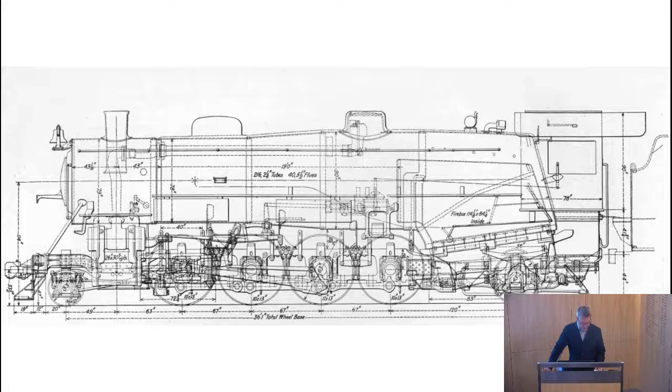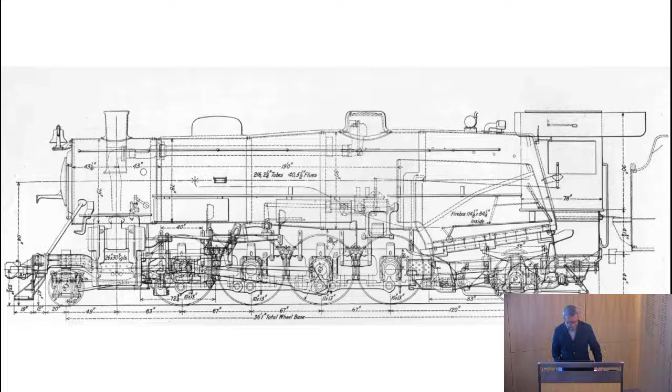During my early teens, I started to understand what fascinated me more about mechanics. I was a keen member of the secondary school engineering club, and the teacher responsible for us was an avid model train buff. He managed to persuade the school to fund materials for a fully operational miniature steam train, and had us all make its parts, some of which required quite detailed machining. It was fascinating to see how this engine gradually grew as each small bit was machined to precise prescribed tolerances. I loved this attention to detail, and I am sure my love of detail was heavily influenced by this experience.

It was through this same club in my later years at secondary school that the most influential opportunity came my way. I was part of a small team of students visited by a structural engineer from Arup. Unfortunately, I can't recall the engineer's name, which still vexes me now, as I have a lot to thank him for. He came and talked to us about structural engineering and what it was about.

He set us a project over a period of months, which was to design a travelling, demountable exhibition. It was, of course, around that time that this collaboration between Renzo Piano and Arup, specifically Peter Rice, had developed the IBM Pavilion, a project that completely gripped me as I began to understand it. The project was so exciting to me then.

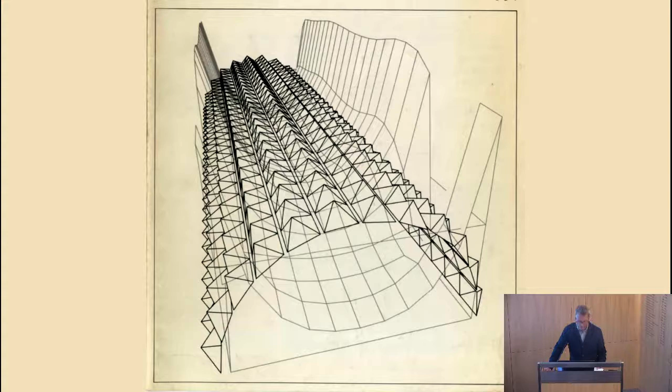We sketched out the design, and we learnt from what we'd been taught, and we trotted off to Fitzroy Square and used a computer at Arup to calculate the frames and establish the member sizes. We were taken on a tour of the recently completed Lord's Mound stand with fabric umbrellas and learnt about this relatively new typology of fabric roofs, all of which seemed so fresh and creative to me.

We went back, built physical models and presented our schemes to Arup, and at the end of the project were judged. Although I don't recall being the winner, it was amazing to see and feel what it was to work in engineering, to tangibly see what can be done through the process of design. This was the single most influential event in my education that ended up making me focus on structural engineering as my career choice. It illustrates the power of a relatively simple intervention in encouraging younger people to be engineers.

As I studied my A-levels, I was introduced to Bill Bailey of Bailey Johnson Hayes Consulting Engineers. I was fortunate enough to be able to work in their office during my holidays. This continued with a sponsorship through the university days in Manchester. Bill was an excellent mentor. He gave me the time and shared his experiences about the fundamentals.

He helped shape my intuition. A man of strong values, pragmatic engineer with wide shoulders to take on any challenge and not to be afraid of it. So thank you for being here, Bill, and thank you for your wisdom and experience.

In 1995, I started working for Tim Macfarlane at Dewhurst Macfarlane and Partners. DMP, as it was known then, was an amazing practice in many ways, and many of today's engineering practices in London and further afield have been formed by the ex-alumni of DMP. It was a hotbed of creative engineers working with some of the best architects in London. As a young engineer, I suddenly felt I was in the right place, doing the right type of work that I could relate to, and my interest spiked.

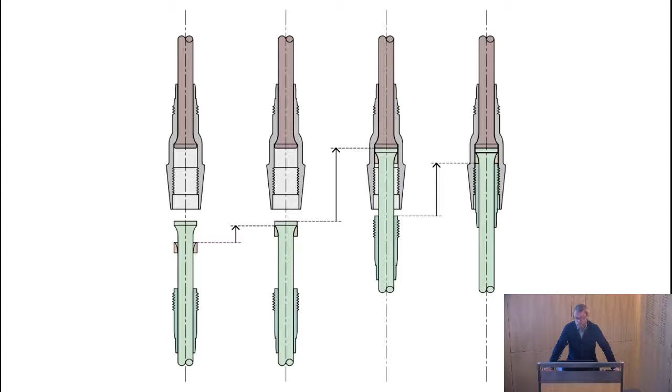It was this, perhaps the CAD skill, which turned out to be the tool that set me free. While I had always been a reasonable sketcher, the accuracy of CAD became essential when starting to detail. It's the only way to truly understand the tolerances, and therefore the only tool you can really use to refine and refine details, which is so critical in engineering and detailing for glass structures.

At this point, I was introduced to Tri-Pyramid Structures, a fantastic, relatively small-scale custom stainless steel parts fabricator. This introduction was pivotal to much of the work I have subsequently done, and we have collaborated on hundreds of custom glass details since. They have a great ability to understand the multiple functions of connections and tease out the most efficient mechanism.

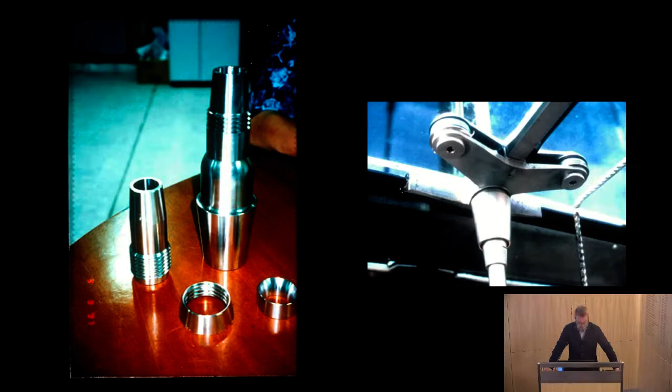I've learned much from them, much of which is traceable in the engineering you will see shortly. The project in Seoul went very well, and the architect Rafael Viñoly invited DMP to support a number of commissions he'd recently won in the US through his studio in New York. I grabbed the opportunity to continue the good work we had done for them in Seoul and went to New York in 1998. The scale was significant compared to the projects I'd done in London, the majority being large-scale public or educational structures, and for this period, much less glass.

One of the projects in which I acted as lead engineer was the David L. Lawrence Convention Center in Pittsburgh, winner of the institution's Supreme Award in 2004. The Convention Center was an important lesson in learning fast how to manage projects of scale with a significant number of stakeholders. The project was a complex one that essentially used a suspension bridge concept merged with a steel megasystem to create long-span, column-free spaces.

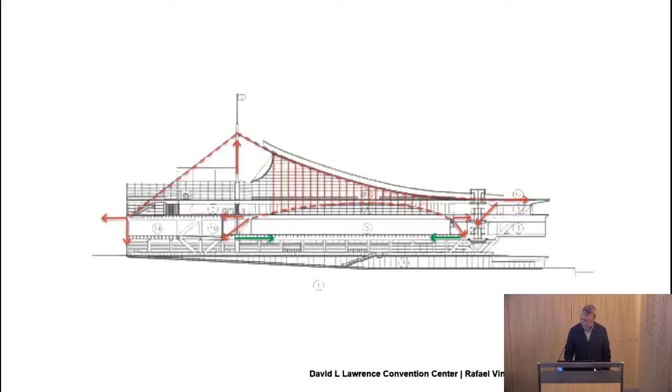It was while working on this that I started to get much more involved in the connections. And the connections are really where the magic happened, an area I was personally interested in refining with the architect, developing giant nodes that transferred these large cable forces into the big steel frames.

It was once, while working through a detail with Rafael Viñoly himself, that I was acutely corrected on a detail I developed for the project. Perhaps naively, I had developed a large steel connection detail fundamentally on the guidance of the US steel guides. The resulting detail was perhaps relatively easy to fabricate, but it was far from efficient in material usage, and was basically ugly.

Anyway, I presented this detail to Rafael. I could see his increasing frustration boiling up as I continually justified this ugly piece of detailing. Before long, he abruptly stopped me with a slam of his fist on the desk and said that I wasn't thinking about the elegance of the connection. So, thinking I was being clever, I pointed out that it didn't matter because the connection was hidden from view and would never be seen. This tipped him over the edge of rage, and he started screaming at me in Spanish some words that I'm fairly sure were not compliments, and surmised that it didn't matter if you couldn't see them, because he could hear them.

I never made that mistake again. Every detail deserves the same attention and the same rigor. And I think perhaps what Rafael could have more calmly referenced was this particular statement by Berthold Lubetkin.

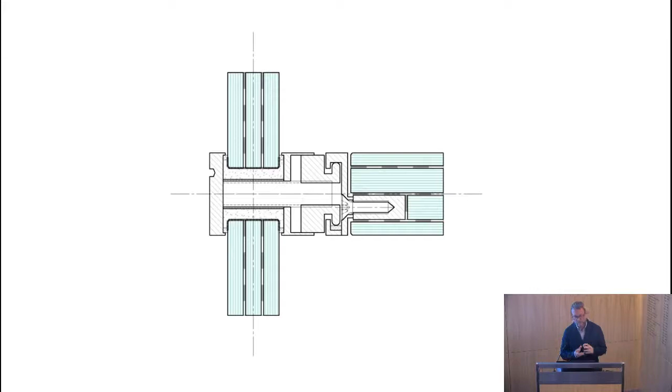So we took these ideas and welded them together in ways, refining a connection that was kept within the depth of the glass tread. It was back to that idea of machining, making sure every millimetre of material was doing something. There was an intention to this detail that not only carried the load and allowed for adjustment in the staircases, but led through to a series and typology of connectivity for many of the staircases and bridges we developed for Apple thereafter. It was the beginning of our innovation in that material.

And you can see here in Soho, it wasn't just the staircase, it became the bridge, it became the handrails, and it was extendable beyond many things.

We're never always going to be doing a staircase in the same place or same environment. This one, for example, in Los Angeles, soon after that first one, was a different structure. It was a series of glass panels hung from above which supported glass treads in the same way, using the same fittings, but the connections were modified slightly so it could accommodate the lateral racking of the building in highly seismic loads.

Then in London, moving forward, we needed to develop something that would allow risers to be integrated with these glass treads, which was a code requirement there. So we developed a further detail, a smaller version, which allowed us to connect risers to the back of the treads. So this carried on.

We started to take this and extend it to different types of structures throughout the network and through the development of Apple stores at the time.

This one in Nagoya was kind of interesting. It was the first in which we decided we could possibly brave taking the glass panels from sitting on the floor and creating a beam, splicing them together with similar connections to the ones we'd evolved, but now demanding much greater loads out of them. With more predictability and satisfaction about how they were behaving, we could be a little braver about how we're using them.

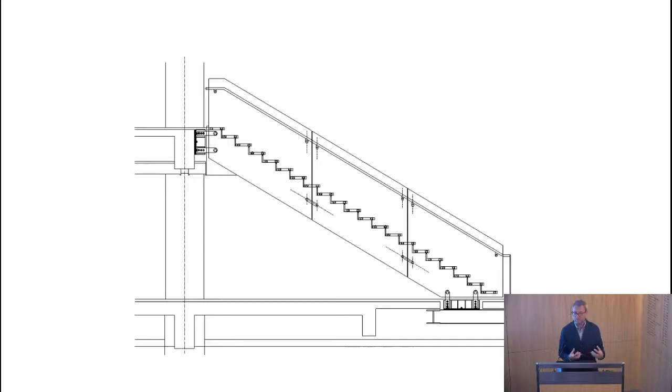Tying each tread to each vertical riser with a modified connection, we get a folding plate behavior and horizontal stiffness across the staircase itself, resisting the lateral forces from seismic excitation, which are pretty prevalent in that part of the world.

Into Beijing, a larger stair was required, broken up into two flights. It was too difficult to do this with splice connections without them becoming too large, so we decided to hang it. In hanging that staircase, we developed another detail which allowed us to pick up the load of each panel within the middle layer of the glass, again using those ideas of insert lamination, with more confidence in the behavior of the materials each time, each project iteratively evolving.

In Covent Garden, it was never going to be straightforward to put it within its own space. In this case, it's combined with historic brickwork, so modifying those details to accommodate the different tolerances between the inaccuracy of Victorian brickwork and the modern German fabricated glass staircase - a different idea of tolerances between the two.

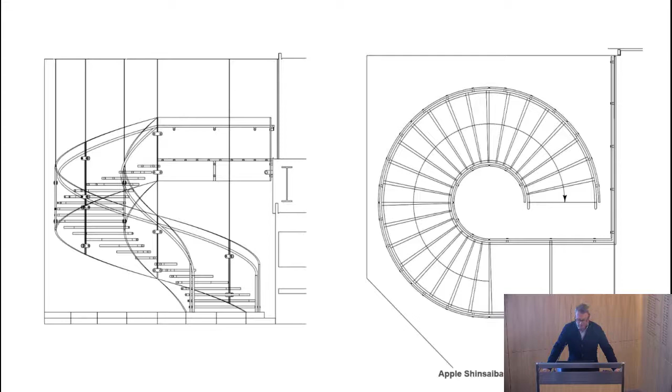And it wasn't always going to be straightforward - occasionally it would have to be somewhat of a different geometry. This project in Shinsaibashi in Osaka was the first to use curved glass. The innovation here was developing and using chemically tempered glass, which gave us much better surface quality, allowing us to laminate more than two layers of glass together to give us the stiffness needed to resist the lateral loads and forces this circular staircase would be subjected to.

It's important to point out that a lot of what we've had to do over time is modify to accommodate quite different design codes, very different forces in different parts of the world, and different cultural attitudes to how you use glass, while maintaining a very familiar aesthetic. When you're inside the Apple Store, you need to know you're in one of these spaces, so we were unable to do particularly custom ideas without deviating too far from that palette of materials and typology. Reverse engineering through that is quite complex, justifying what you already have to codes you don't understand at the time.

A lot of what we've done is about testing. Most of these early projects we worked with Seele in Germany, and they get very enthusiastic about testing things - sometimes a little too enthusiastic, I feel.

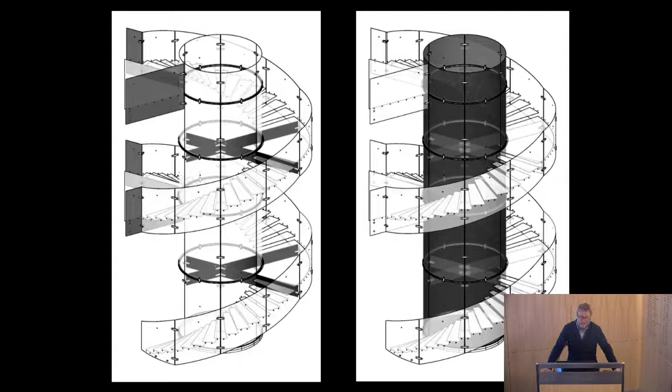That led to always moving on to different locations, different staircases. This, for example, in 14th Street, took that single story to 2 stories and relied on a single circular glass core and a series of glass beams that cantilevered, fulcrumed through that glass core, which acted as stability to pick up the external layer of glass.

You can see here this started to become a bit of a trend - not my advice - to start putting, just before the store opening, everybody on the glass stair, jumping up and down and clapping. I call this structural engineer waterboarding.

So these stairs started to take a language of their own, a little bit more sculptural I suppose. They started to become the centerpiece of these retail spaces, which was arguably detracting from the product itself. But it was how things were evolving at the time through the design team - and then more waterboarding.

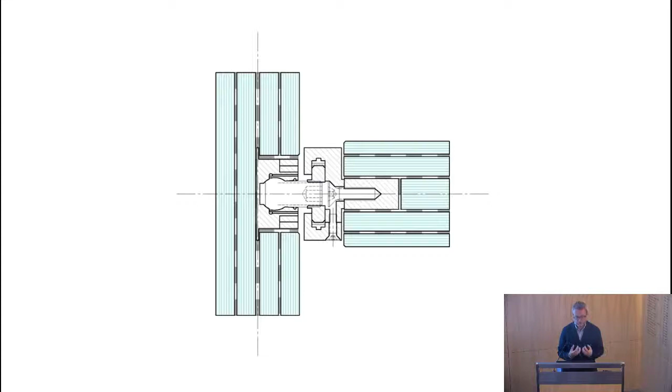We moved on and started to evolve and develop more ideas, keen to take that development of each fitting and integrate it further. This was a step where we were able to take that external fitting, get everything within the vertical load-bearing element and within the step itself, preserving the quality of that surface of glass, the quality of the material we're so interested in pursuing.

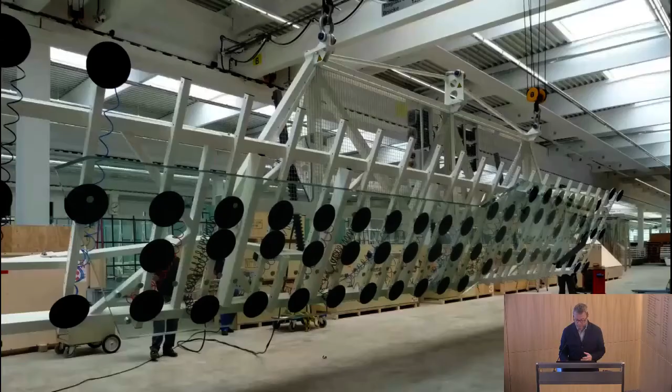This evolved a glass material, an element completely laminated within the glass itself, preserving the surface of glass. Once we'd started to make much larger glass, which I'll touch upon in a moment, we were able to integrate each one of those connections within a 15-meter piece of glass, going from single panels of glass into one single piece.

Here you have in Hamburg the first 15-meter spanning glass stair stringer. Each bridge and each handrail balustrade was one single piece of glass with every fitting prefabricated within that element itself, preserving the surface of glass - just a little bit more waterboarding. That version then replaced what we'd done in that original photo in Soho.

It became quite successful, and it was about then that we started working with Foster & Partners on retail, and some really exciting things began to come from that relationship. Flexing our ideas and combining them with new ideas, I think, really made something magical happen.

This was a project in Zorlu in Istanbul, built on the idea that you don't really need another element to support the staircase when you've got a glass wall that also forms the envelope itself. Integrating this idea of reducing structure and combining structure into the building envelope became an important part of what the next series of projects I'm going to show you are about.

I find real interest right now in trying not to double up and not have redundancy in other elements. That was extended here in Guangzhou, where we had 14-meter pieces of glass, each creating the envelope of the store, with each fitting laminated within the glass - so there's no need for a structure supporting the stair when you have the glass wall there to do the same thing. I think that's quite a powerful message.

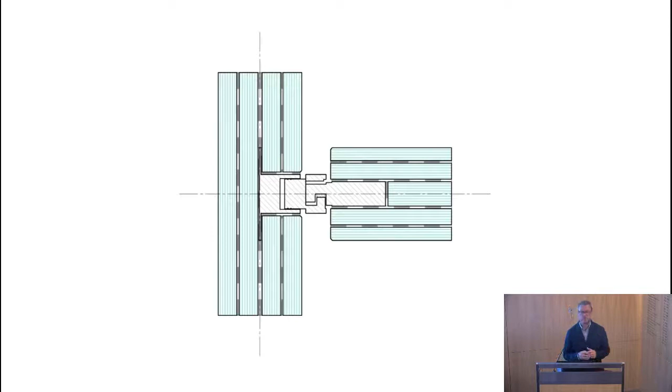Foster & Partners, in particular Stefan, had a very keen interest in refining further those details we'd been developing - in this instance, aligning them, making them more sympathetic to the geometry of the glass treads themselves, and calming them down, getting away from that sort of punctual fitting we had before. It started to really release the ideas we had in glass and made it really sing.

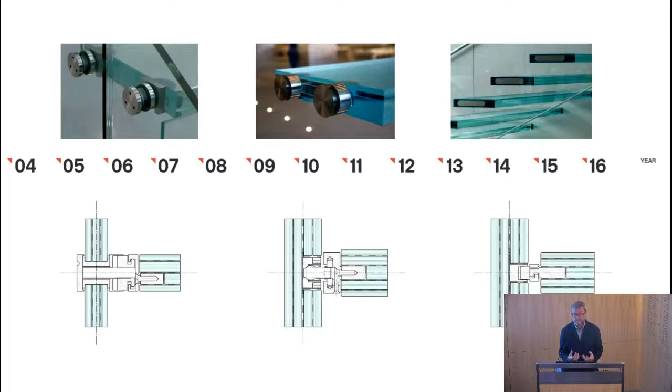Over time, you can see it was a sort of iterative development of this typology as everybody had an influence on it, as fabricators understood more about what they could make, as we had more understanding about what we could engineer, and we felt safer about what things we could do. This in itself, to me, was about innovation—that iterative development of solutions, developing over time.

A seminal project for us was in 2006, with Bohlin Cywinski Jackson for Fifth Avenue in New York. This was, in fact, the entrance to an underground shop, and it created a sort of glass lantern to announce its entrance. Structurally, we were keen to have a glass structure and to also have it clad in glass in terms of the sizes that were available at the time.

The challenge was that the autoclaves available at the time were only 6 meters based on industry standards, and we needed 10 meters. So we used aircraft wing autoclaves to make glass fins when they weren't making wings, and that enabled us to create this particular project.

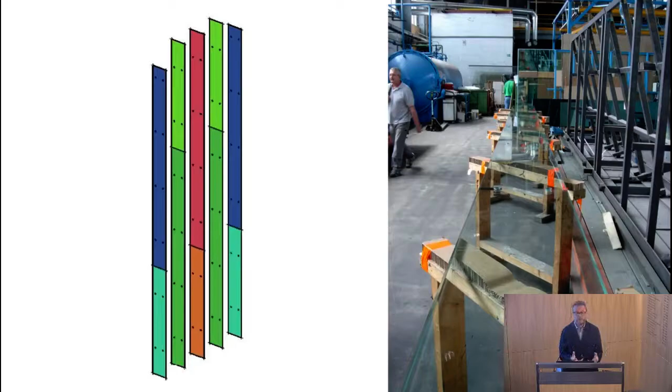It then gave Mr. Seele a very good idea, and he went and bought a 12-meter autoclave. With that, we started to experiment with much larger jumbo pieces of glass—again using the elements we could, taking 6 or 7 meter, 8 meter pieces and splicing them together to make larger jumbo pieces. This, for example, is a 15 meter by 3 meter piece in fabrication for this project in Sydney.

And you might ask the question, well, why bother? Why don't you just, given it's all made out of glass, put joints in it? Really, that was about the fact that we were maniacally chasing transparency at the time. By increasing the size of each panel, you're reducing the number of joints, and therefore reducing the number of fittings.

It's an important message in terms of the design of fittings and the success of glass structures, because it is the fitting that you see—it's not the glass. So the energy and effort need to be equally balanced on the beauty and elegance of that connection, the refinement of it, if you're going to make a success of a glass structure. Alternatively, have less of them, which is one way of doing it with much larger pieces.

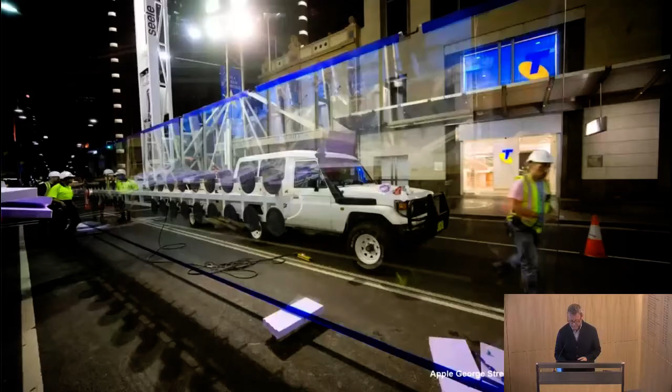And over time, there's now more than one place you can make this. There are several places in the world you can make 15-meter pieces of glass. The equipment is now fairly available in many different parts of the world, and that availability for this type of glass has come into more use, not just for Apple and way beyond that.

So in New York, another example of a project which used a similar scale of glass, using similar ideas to create building space and transparent spaces.

I think the next step for us was really when this project came along in Shanghai to develop a circular glass pavilion, 12 meters tall, but also to make it entirely from glass, working with people in China for China, and it was roughly around the time of the Chinese Expo.

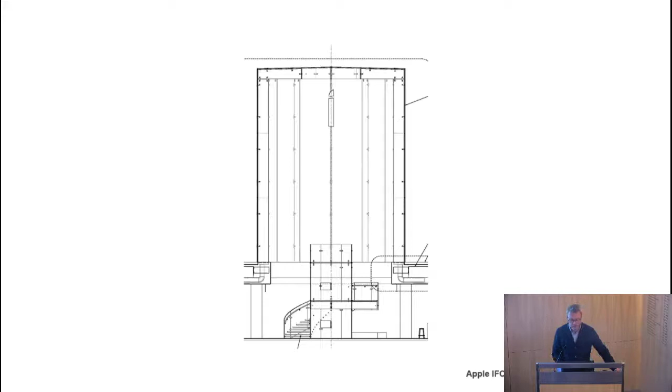I spent a lot of time at that point going off to China and seeing lots of glass fabricators and trying to understand what they were capable of, and I stumbled across Beijing North Glass, who were a wonderful bunch of people. They had incredible enthusiasm and literally no idea what they were doing.

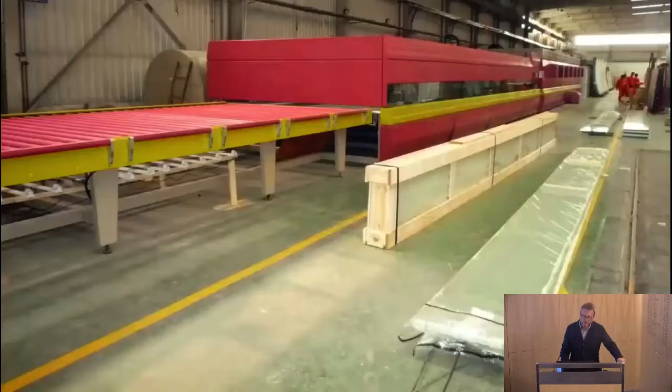So I went with the enthusiasm as being the most valuable thing that I could pick up on at that point. And we talked, and they said, it's okay, we can design a 14-meter toughening oven, and we'll have it fixed and ready in 3 months' time.

I looked at them and picked myself off the floor from laughing, realizing that at that point this was twice the size of any tempering oven that had ever been built anywhere else in the world. I wished them good luck, and off I went.

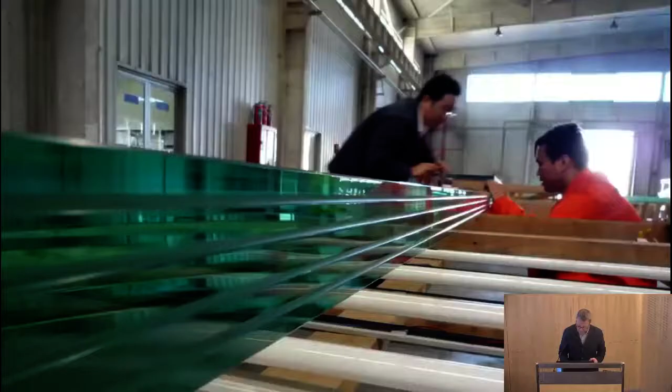They called me back five months later and said, we've made it, come to Beijing, you can see it. So I did, and they had. Sure enough, they'd built this machine which was able to toughen and strengthen a 14-meter piece of glass in one piece, so we no longer needed the splicing idea—we could make it in single pieces. They learnt to laminate it to the quality we needed fairly swiftly, and to curve it.

With that, we were able to build buildings with fewer joints and singular monolithic pieces—for example, this one in Shanghai, which again was an example of that mission and drive towards transparency, using everything we could within the arsenal of fabrication and our engineering ability to do so.

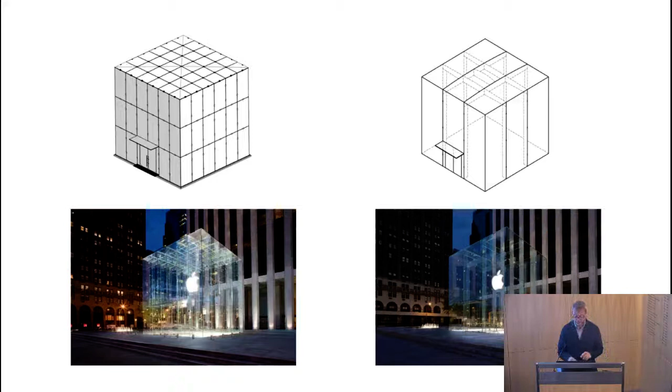Around 2011, we had the opportunity to reimagine and redesign the cube we'd built in 2006. From that, we were able to take it from 90 panels of glass down to 15, using much of those ideas and technology we'd developed.

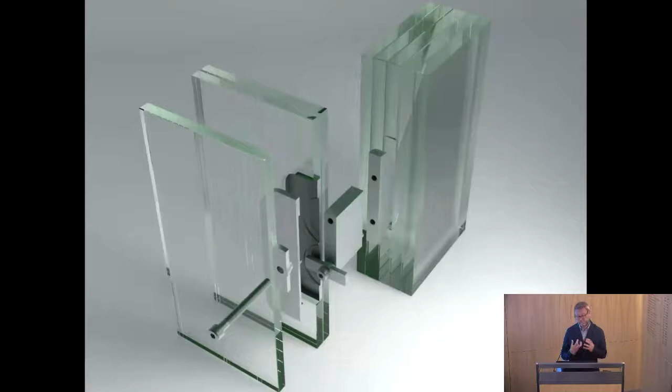So the larger glass, the integrated details—in doing so we could make a much more transparent structure, getting everything within the glass itself, protecting that surface reflectively, that quality of glass, and distilling that from one level of transparency to another in the same move.

I think this statement resonates with me because it's about keeping the details as refined as possible, because it is the elements that you see.

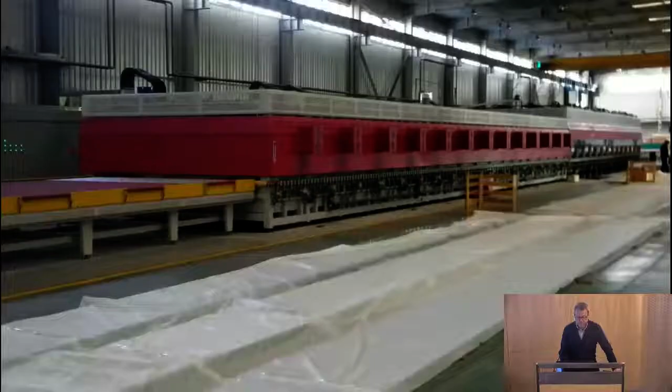So the next step was to make that bigger, and now we're able to make 18-meter by 3.6-meter tempered laminated curved panels. A number of those have found their way into projects around the world.

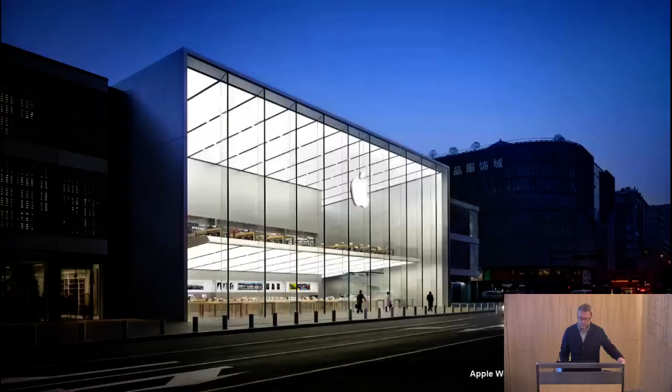And the projects with Foster and Partners, taking that idea and simplifying further, reimagining the way we connected the glass to really calm this down and make the most of the glass itself, expressing the size and scale of the glass relative to the spaces, creating these really open spaces and allowing for inside-outside spaces.

Harking to the ideas of these internal town square type spaces that Apple were trying to develop—this kind of connection with the community itself.

This instance I particularly like, where we're able to take these large door frames which open and close over the space, and use that in itself to stiffen the glass so we can avoid the need for any mullions, etc. So each time we're pulling a trick that simplifies things further.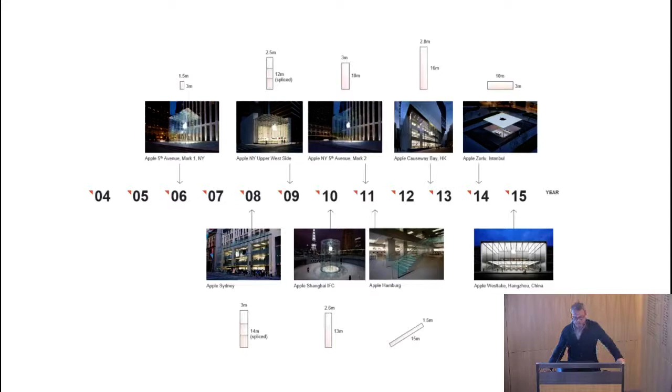So that, over time, was our march in the size of glass as we went further and further through to 2015, 2016. And I want to talk about this particular project.

This was really important to us because it was another shift in idea and another shift in materials. This was a lantern on top of a store in Istanbul, and Stefan at Foster & Partners was very keen that we find the simplest way to express this. So four pieces of glass was perhaps the easy and straightforward answer.

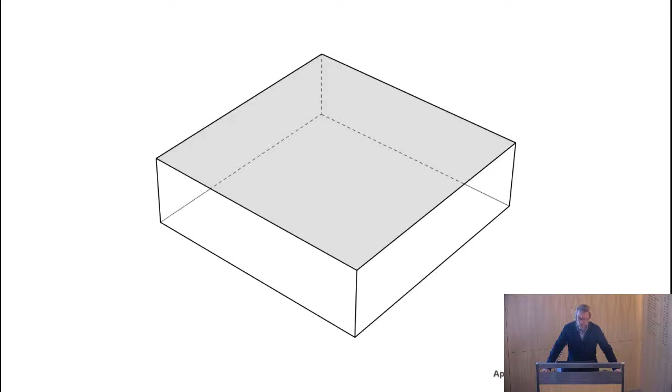We knew how to do that—10 meters long, 3 meters tall. That was a bit of a no-brainer. How could we then put a roof on it?

We studied ways in which we would do this with glass, and intuitively, of course, that's where we started, and that's how everybody imagined it might be. But the glass could only be 3 meters wide, so to get 10 meters across wasn't really possible with a piece of glass without making it extraordinarily thick, or looking at ways to support it.

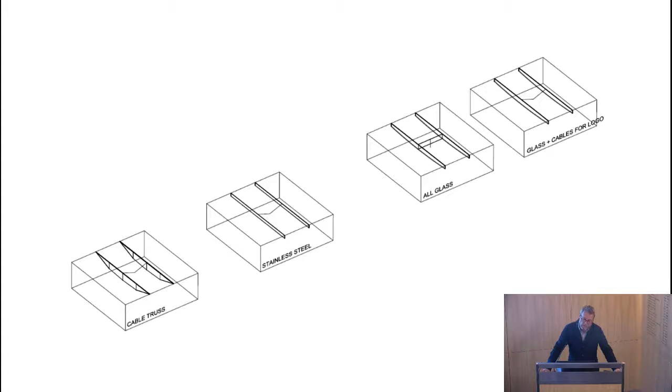You could put glass beams in, steel beams, trusses, anything you wanted, but it all kind of jarred with the simplicity of these four pieces of glass, and it wasn't really satisfactory from that perspective. So Stefan was very keen to find something else, and it was with him and our team that we stumbled across other materials, and we started to look at composites, and in particular carbon fibre.

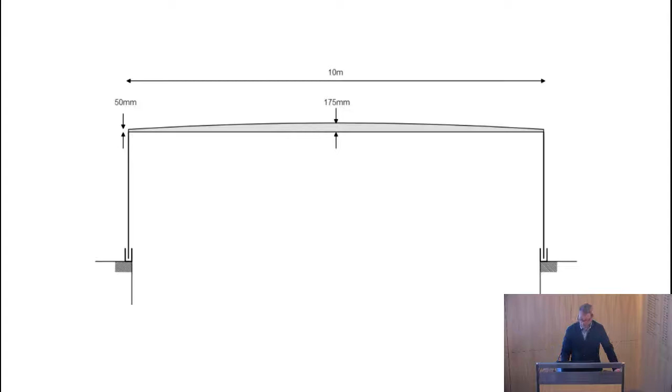This was a trick that, while rather simple to imagine, the simplicity belies the complexity of how you actually achieve that. There's a significant number of forces you have to accommodate through those joints, deflections and movements. But you can make this almost imperceptible structure, which is ironic because it then won the Supreme Award for structural engineering for a structure which seems to have no structure - which I think may be, to some extent, a recognition that there is redundancy in a lot of what we do, and it's a journey in how you use materials to get to that point.

And it kind of led us to this next project, which, when we were invited by Foster & Partners to be a part of, this is now known as Apple Park - Apple's headquarters in Cupertino. It's an enormous, epic building of great scale and great complexity, resolved in some very simple and beautiful manners.

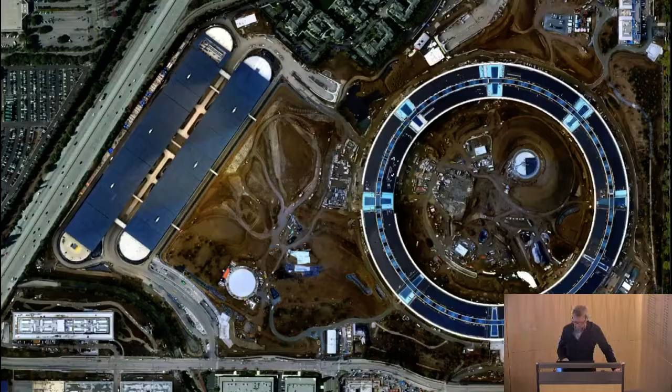But I'm going to focus a little bit, after talking about some of the glass on it, on this little theatre, which is a little dot between the oblong-shaped building and circle, now known as the Steve Jobs Theatre. But before we get to that point, I worked with Arup, the engineers for the building, and with Foster & Partners to develop ways in which we take this glass technology we'd developed through the retail world and relate it to this building.

You can see the adoption of these 15-metre, 3-metre panels meant that we didn't need to have any mullions in the perimeter itself. That was super important for getting the connection between the inside and outside. And having been in there personally, it's quite a remarkable feeling to be inside that space and have no perception of your envelope, such that anything you see within the park space beyond feels entirely within your reach.

The solar shades, these white glass blades, were a particular engineering marvel in my mind, developed by Foster & Partners and Seele, where they're using a secret white formula, bonded to create, and then working with Gartner, who did an amazing job putting these on the building. So there was a lot of innovation that had come from that work in retail, baked into this, and yet again this itself started to develop lots of new ideas.

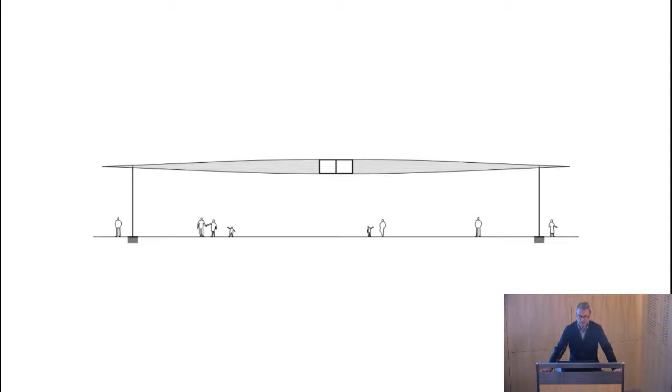Having come through the journey at Zorlu, it was a little bit more of a relationship about how we could extend that. Working with the guys at F&P, Premier Composites, Frener & Reifer, Seele and sedak for the glass, we developed these ideas of integrating the glass within the roof itself so that these forces could be translated and transferred from the roof - quite significant seismic forces - into the glass through to the base isolation, which was a very clever design by Arup, in which the glass sat.

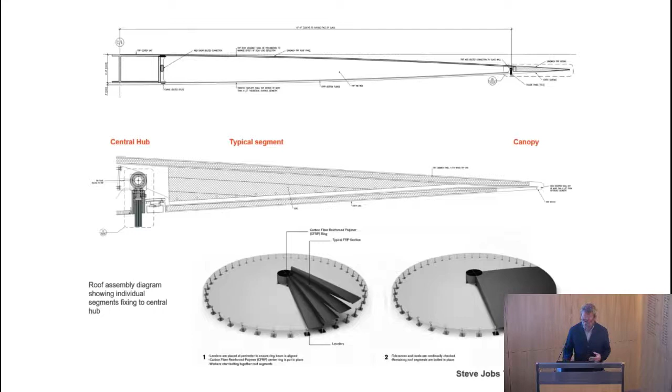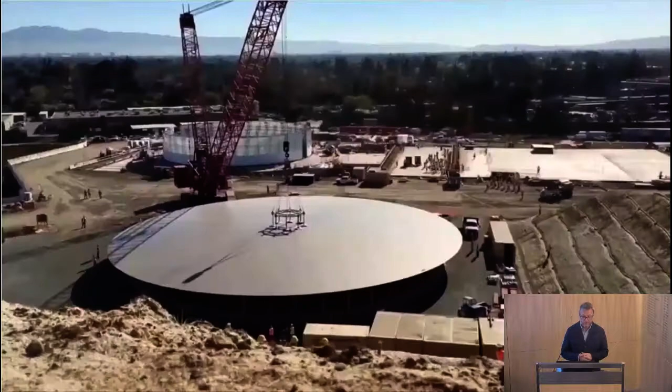So the whole thing was a series of 44 segments of carbon fibre, fabricated and bolted together on site - fabricated in Dubai, shipped, and then bolted together on site into this template you can see here. And in the background, you can see the glass ring. And then it was lifted in one single piece.

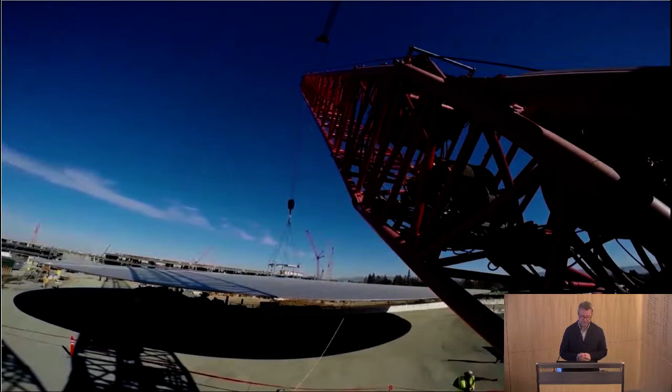And you can see it's almost impossible thinness for its scale. It's quite remarkable, particularly at this point. And then this was all done in one day. Makes it look easy, doesn't it? But I can assure you it wasn't. You didn't want to drop it.

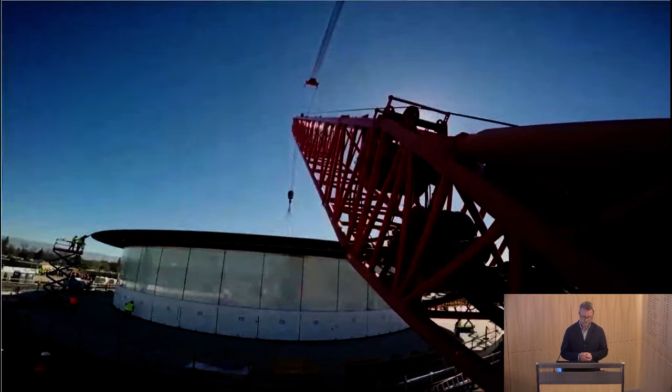And then placing it gently onto the glass and connecting it and finishing it. And there in turn you had this most incredible space that allowed this connection between the inside and outside without that structure. Now, you will notice that there's lights and sprinklers in the ceiling, and every single one of those silicone joints houses a conduit that either has a light conduit or a sprinkler conduit, 44 times around the perimeter.

So in order to do so, that's how you serviced it without any vertical servicing or obvious servicing. The space itself required an elevator, and we had a little bit of fun here in developing a glass elevator that only had two stops, but the stops were opposite each other. So in order to get into a cab, you would enter one side, and as you descend, the cab rotates on the helical rails that you see within the glass cylinder and deposits you out the other way. Needless to say, that was quite a complicated thing to build and fabricate, far more in that respect than perhaps in engineering it.

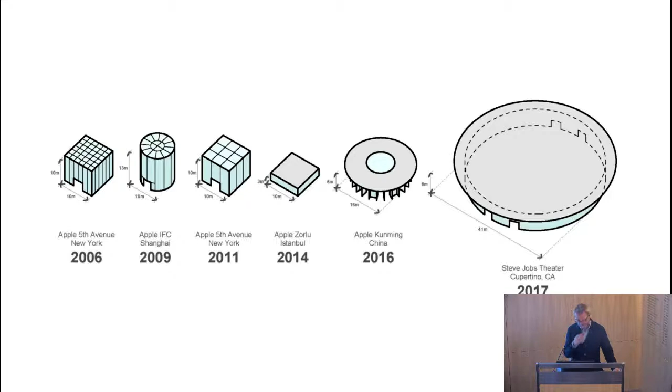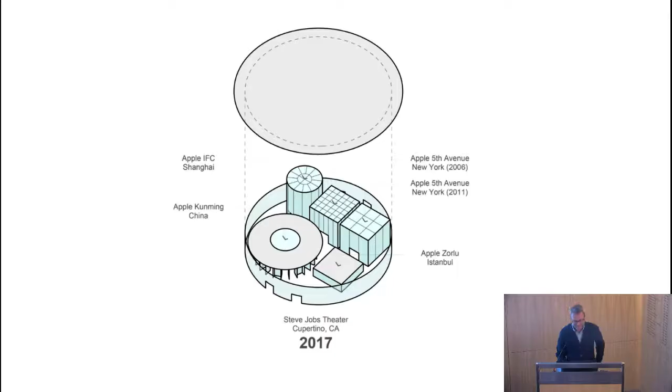So here we have this sort of march of projects, and we figured out that they all sit within the same structure in many ways, which has nothing to do with anything other than the fact that that happens to be the case. Somebody in our office was clearly too bored to figure that one out.

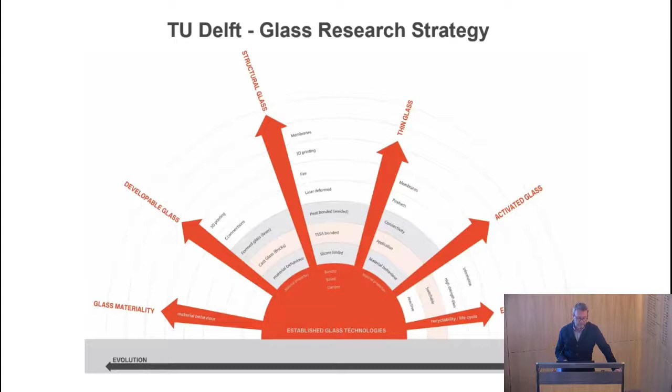And my role as a professor of architectural glass at TU Delft, which I've recently started in earnest, a lot of what I have to do is try and understand where we are with the embryonic understanding of glass technology today, which represents the sunrise in the middle, and where we intend to take it. And these are the sort of streams that we're looking at: how do we develop thin glass, what uses can we use for it, activated glass, how we can use it to communicate, structural glass, how we can then further develop that, and of course energy, and how we can capture it or reject it in terms of the use of buildings. Thin glass is kind of interesting.

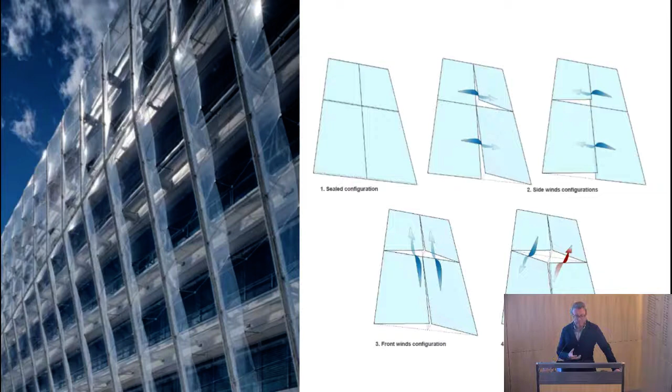It's been around for a little while now, since the advent of the iPhones, etc. And we're still trying to find ways in which we might find it useful on buildings. We're quite interested in finding ways to use its flexibility and strength in order to obviate the need for mechanical systems or hinges that would otherwise be needed in glass facades.

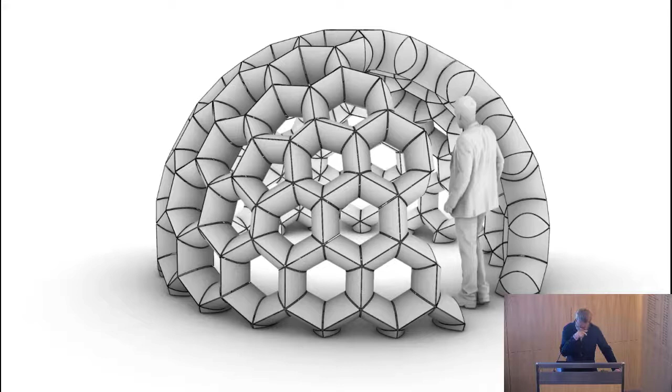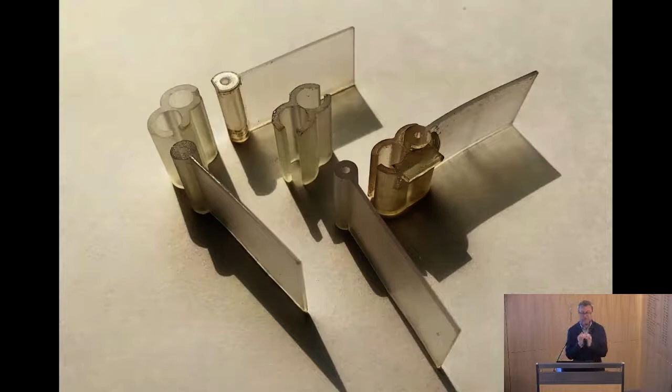We're also looking at this particular pavilion, which takes thin glass and creates structure from it. This is early days—something we've designed and are sponsoring and funding the development of as a prototype. It takes the idea of very small pieces of glass, clamping them, and holding them together by creating digital printed elements that we've printed in the office as prototypes, sliding in these little joints.

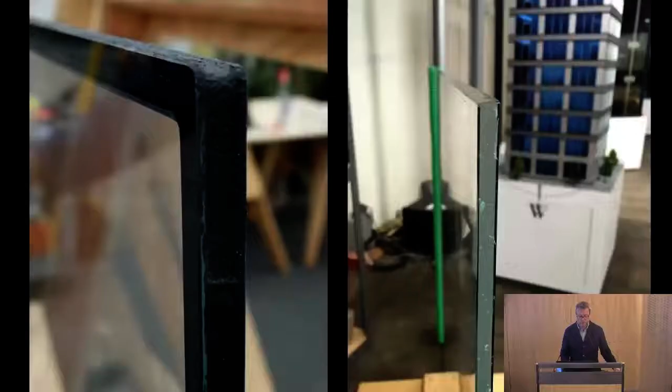So I think there's a system in there somewhere, something that might come out of it. It's somewhat prototypical, but it's got an idea, and I think it's got a life that we're quite interested in exploring further.

Thin glass can be used in many other ways. I think there are ways we might be able to combine it with acrylics to make a more lightweight type of glass, so you get the effects of light with a much lighter material, using the surface qualities of glass as a veneer, or even using double glazing or insulated units in a much thinner version, so we can replace heritage buildings with thin insulated units, bringing their energy performance much higher than when we're not able to change the frames from a heritage perspective.

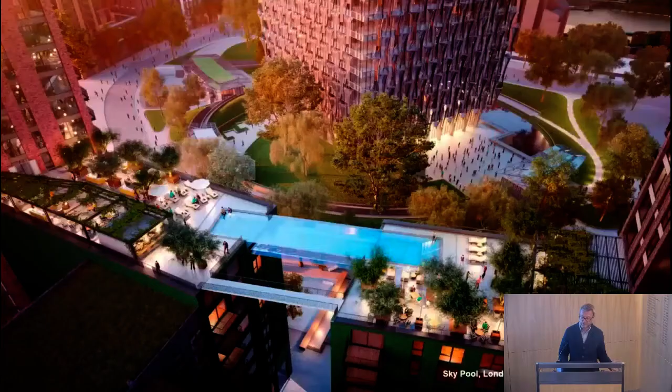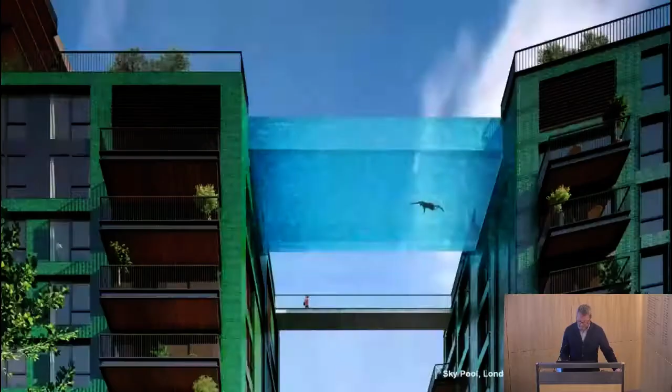Our project in London, the Sky Pool, came to us from Arup Associates and Hal Architects as a glass pool concept, and we convinced ourselves that glass wasn't really the right material, and that it would be better if we used acrylic, a bit like a fish tank, so we could bond it together into one single piece and ship it from Colorado, where it's now being made, and lift it into the building in one piece.

So sometime this year, you will be able to see yourself, or somebody else—because it won't be me—swimming in this pool between two buildings, which we're all very excited to see, but we'll see how that comes about.

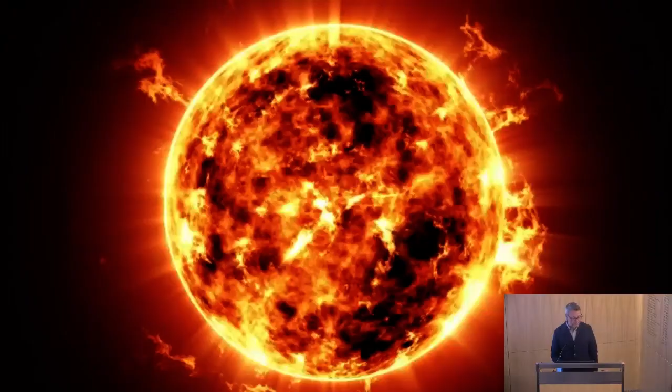So as we move on to glass, I thought it was important to touch on circularity and sustainability, because there's an effect there relating to some of the work I've been talking about. There's a need for sustainability and how we shift towards that. We are all designing buildings in a world where limiting energy consumption increasingly drives the form of our buildings. Structure and materials innovations drove identity in the 19th and 20th centuries, and energy is doing that now.

But even if we crack the energy problem, we still only have one Earth. Our resources at the surface are limited. Conserving those physical resources will surely become increasingly critical at every level of architecture and engineering design.

"Architecture is the most dangerous art form on the planet"—a quote by David Adjaye in a recent Radio 4 profile of the architect. I thought on this, and I don't really see architecture as only an art form, so I don't really buy into this slightly sensationalist comment. There is obviously a vital role for architecture as the conduit between the societal need for buildings and their responsible realization. That said, the impact of the statement is important.

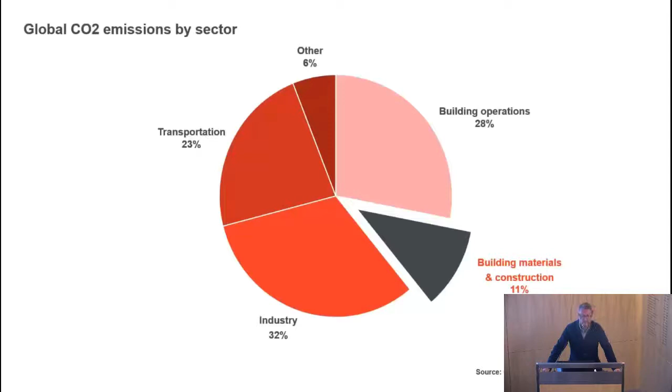Buildings are a very energy-intensive activity—we all know that. Construction uses half of all materials used by people. If the cement industry was a country, it would be the third largest producer of CO2, behind China and the United States.

We keep building because there is a need for a growing population. Conservative estimates say we will need to build 2 billion new homes before the next century ends. We also need to keep demolishing and rebuilding, often when there is no need. We have to positively address this issue of embodied carbon in buildings. The fact that we as engineers are a significant factor in the specification of building materials means we are complicit in this most dangerous art form on the planet.

Clearly, I can't claim to be a sustainability evangelist through the work I have done to date. As I mentioned earlier, I was the facilitator of building the same glass building twice, for no other reason than increased transparency and technology expression. But I have realised in recent years that enough is enough. There is clear evidence that we have to change what we do, and do it faster, if we are to arrest climate change.

As structural engineers, we have been slow to react to this, typically seeing sustainability as the remit of the mechanical engineer in reducing life cycle energy usage through efficient renewable technologies. To address this, there is a lot of increasingly well-funded research into more sustainable approaches and materials for buildings. This is clear and very welcome. There are also increasingly more buildings being completed that are beacons of that changing attitude towards material sustainability.

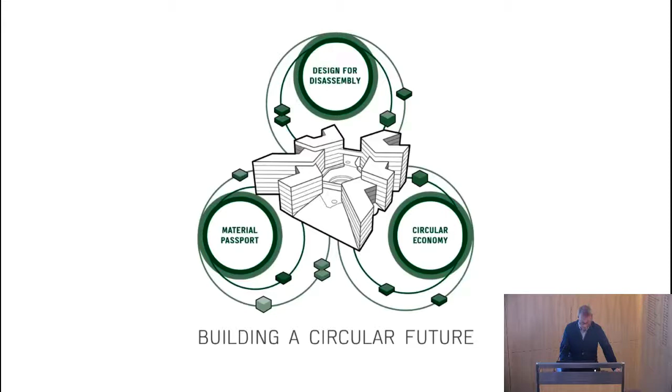Over 18 million tonnes of glass is produced each year, accounting for 0.2% of total global energy consumption. With glass, it is actually very difficult to recycle into buildings, and tends to be more energy consuming to recycle than it is to make in the first place. So I'm more interested in repurposing glass and facade systems, adapting them to evolving needs. The sustainability of glass in buildings will be through innovations and solutions that address circularity.

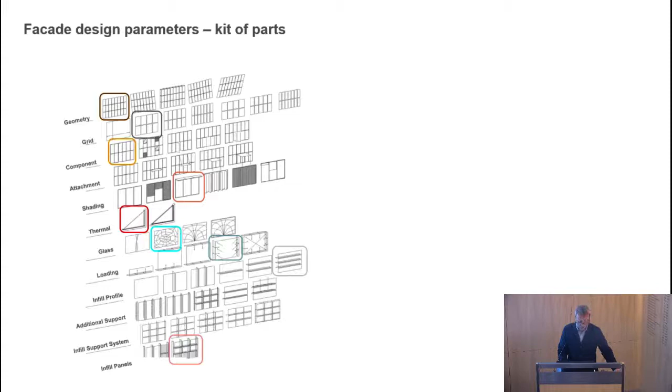An established proportion of our R&D work is now funded by streams of revenue from tech companies. They are recognising that they have a responsibility, with the resources they have at hand, to stimulate and accelerate sustainable approaches to their expanding building footprint, and to extend that to the wider construction industry. An example we are currently working on is the development of a kind of kit of parts that allows the facade system to be constructed with a selection of modular elements, allowing a degree of freedom in the design. They also have the ability to be tuned and controlled in terms of embodied carbon content, a system that allows for reassembly, adaptation and reuse without significant energy usage.

Tomorrow's engineering. Computational power has released us, and we as engineers face the fastest changing landscape in how we develop solutions in the history of our discipline. Data is defining us as we find increasingly creative ways and uses for it. It is here to stay, and we must embrace it. We will see failure. We will see extraordinary progress as a result of the power that computational design now affords us.

We must be brave. We must run as fast as we can, and we must use every ounce of our wisdom to keep us on the tracks of rationality. But at all costs, we must not block development and innovation with an attitude of restraint, or we will fall behind.

Engineering has firmly moved on from the serial approach, where our first estimate of structural sizing was either validated by a calculation or perhaps further refined by reworking those calculations. Now we first build a parametric tool to do all that for us, and then allow the computer to significantly more accurately refine geometry, sizing, and performance simultaneously. It's no longer serial, it's parallel. I feel this step is as significant a leap in how we design structures as was the first software analysis that allowed us to use computers to analyze structural behavior.

We can build on these tools ourselves with low cost freeware, which provides access to a much wider audience of engineers around the world, which in turn will stimulate more ideas. It will stimulate creativity in engineering design.

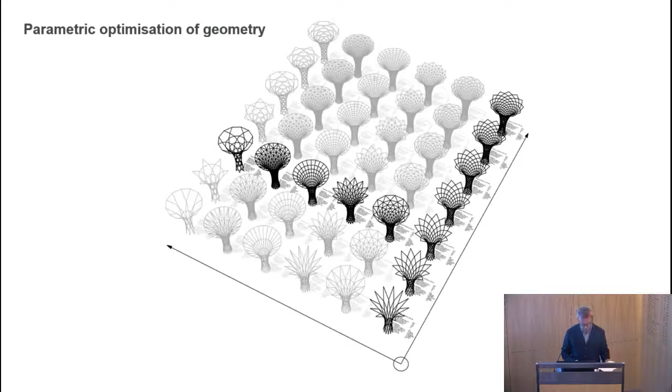A project we are currently working on in Paris, our office in France, uses the tool which was developed to analyze the structure and geometry, a lightweight biodome that really needs every ounce of efficiency leveraged out of the structure to keep it economic and magically transparent.

Inputting the parameters and adjusting where needed, the tool will iteratively test the optimum structure within those set parameters. The speed and efficiency with which we can now do this means we can test many more ideas without having to go back to the drawing board. Testing design ideas becomes live and exciting and less of a drag.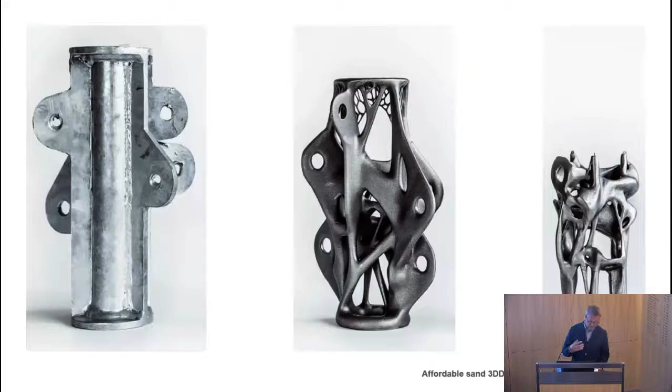Topology optimization uses computers to generate optimal forms and grid structures. I love this example of a connection developed by Arup, which shows how this process can develop a more materially efficient connection, which in turn, when printed, uses less material than we needed to achieve in the first instance.

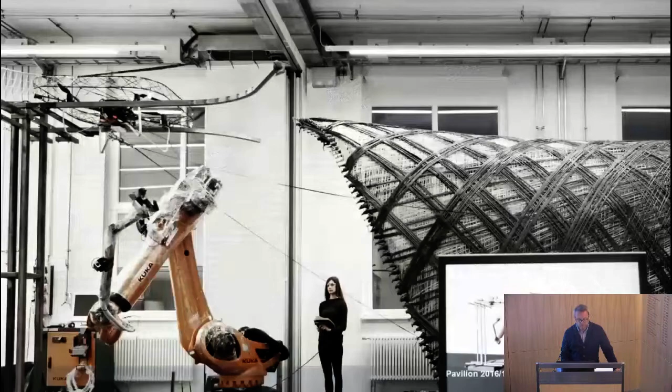And these ideas, this is an idea that's actually real, in Stuttgart, the University of Stuttgart have developed ways in which not only can they develop structures iteratively through parametric models, but they can also then weave it using robots and drones and create structures that are real. This is what we're seeing today.

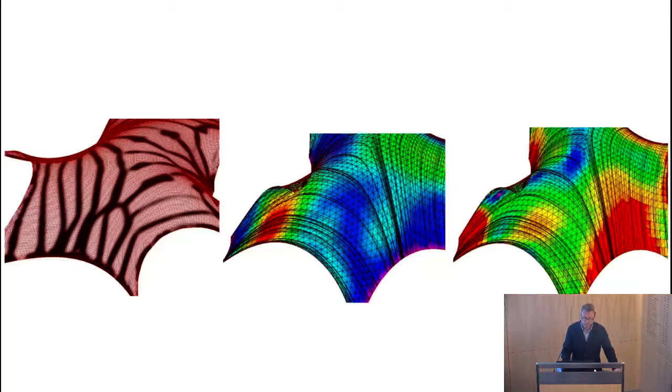And as if engineering on this planet was enough of a challenge, we've recently found ourselves engineering on another planet in a competition for a Mars habitat sponsored by NASA. Along with Hassell Architects, we imagineered ways in which materials could be found on the surface of Mars and be sintered by robots acting as digital printers, forming a shell to protect inner structures and inhabitants from aggressive environments you would otherwise find there. It's tricky engineering with a material you have never seen on this planet.

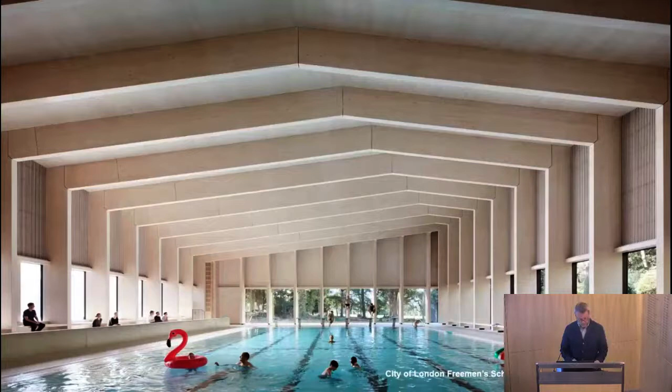We all know engineering is truly wondrous. It surrounds us like a duvet 24 hours a day. It has a deep societal need and it's constantly changing people's lives for the better. But much more needs to be done to make that understood by a wider audience. The construction industry can be a creatively stifling environment where a true sense of value is often difficult to persuade our ultimate client of, but we should see this as a challenge and an opportunity.

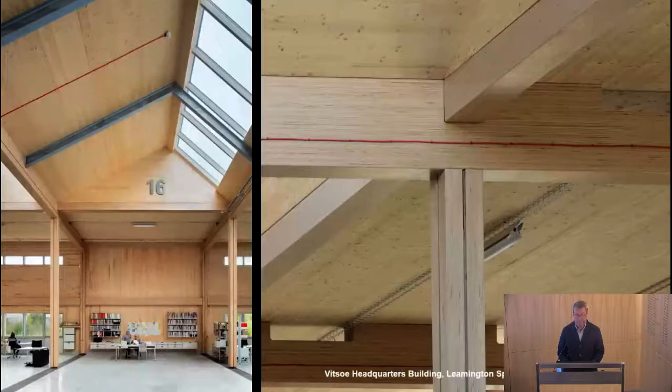Increasingly, engineering is being seen as a commodity, something you just buy competitively based on price, a view that essentially places less value on what you provide and more value on your professional indemnity insurance. We have seen the concept of specialism around our subject grow to combat this drive towards commoditization, and I expect we will see more of this evolve at a grassroots level.

We will need to do more at the same time in order to survive and illustrate the value. We as structural engineers need to get much better and more persuasive at it if we are to reinforce the position we have in the process and to clearly define our value proposition.

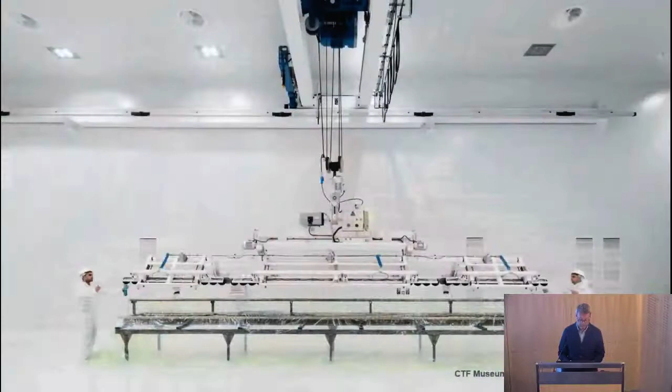My most important job is to influence and inspire, just as those who I noted did for me in my career. I see it as our collective duty. It is imperative to the longevity of structural engineering.

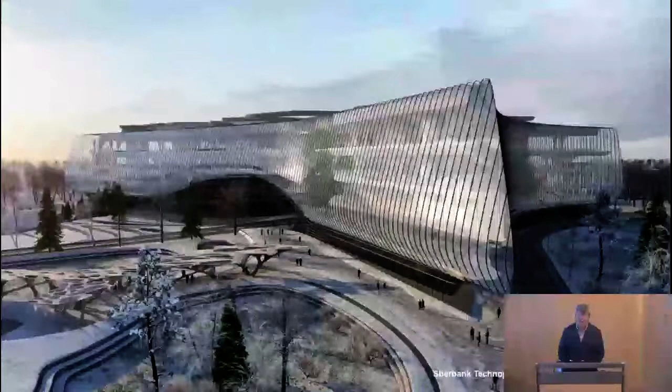We need more engineers. We need to arrest the flight of those who study engineering and move to other careers. We need to communicate better about the incredibly fulfilling opportunities that engineering presents. Our value as a discipline depends on the quality of solutions and the service we provide, which in turn relies on the resource that is available from the educational system.

Currently, in the UK, we face an annual shortfall of 59,000 engineering graduates to fill engineering core roles. Brexit will further exacerbate this resource shortage. Despite the headwinds, engineering is at an exciting precipice right now, and something the younger engineers have an opportunity to take to the next level.

I am excited to see where that takes us as much as I ever was. I hope I have the tenacity to hold on for the ride.

Thank you. Thank you again for coming, and I hope that my enthusiasm for what we do is just a little bit infectious.